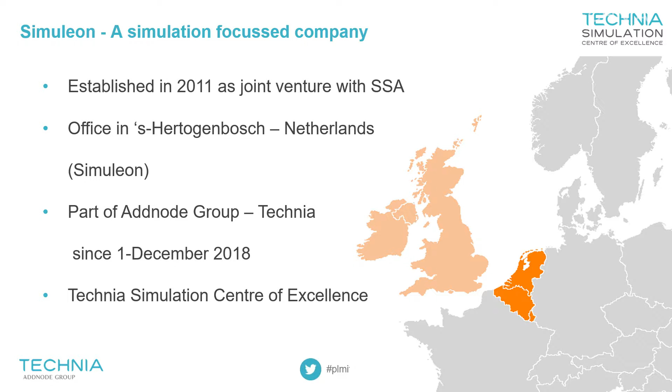So, our company was established in 2011, and that was in the time when I was still working for a SolidWorks reseller. From that business, we started up this company together with another company in the UK called SSA. Both companies formed together, were called Simuleon, and we were working together already for a very long time.

As per 1st of December, we were acquired by Addnode, or by TECHNIA actually, to form the TECHNIA Simulation Center of Excellence and to help TECHNIA with the exploration of simulation within their installed customer base. And obviously the PLM knowledge would also be of beneficial help towards our customers.

So what are we about? Obviously we are a highly focused group, so we don't do anything else than simulation, so that is what we focus on. So personally I haven't done anything with PLM. I know a little bit about it, I know a little bit about CAD, but I'm not a specialist like these guys.

In total, we're approximately 30 simulation specialists, developing simulation models and material models, all those kinds of things. That makes us actually one of the biggest Simulia providers within Western Europe, and therefore a highly recommended partner from Dassault.

What you need to know from the Simulia solutions that we provide is that we don't really focus on one given industry. So I'm now doing a presentation here in civil engineering and construction, but I'm also doing a presentation in industrial equipment. And the reason for that is that with the simulation solutions, we don't really focus on an industry, but we just focus on solving engineering challenges. And they can be in any industry, basically, whether that's life science or civil engineering, industrial equipment, automotive, aerospace, doesn't really matter.

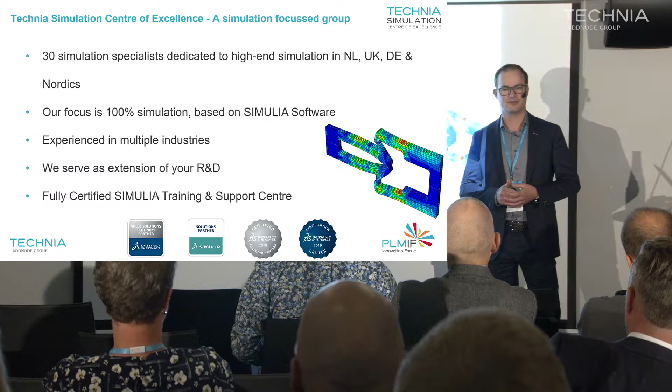Unnecessary to say, but we are fully certified. We have all stickers and buttons and certifications, obviously, to do everything that is needed to position these tools. So what is then our added value? If you look at the value that we provide, then simulation is all about the knowledge.

So the people that we have in our skill set, they come from different areas. We have people who are experienced in biomechanical engineering, windmill structures, foundations, earthquake analysis, vibrations, those kinds of things. Those are all things that we do. In the world of simulation, there are things which we call linear analysis and non-linear analysis. I'll tell you a little bit about that, what that is.

But we mainly focus on high-end simulation, which we see as non-linear analysis, and I'll explain later on what that is. Obviously, because we use the Dassault simulation portfolio, the complete Simulia brand, you can expect to have the latest and greatest technology applied to solve your challenges, and we are very open and collaborative in how we do the things we do. So what is it then that we deliver as the TECHNIA Simulation Center of Excellence? It's a combination of four things.

So on one hand, obviously we provide software, but I don't think we are only a generic software provider, because we are also a customer of Dassault. We purchase the software, we use the software, and if you look at our margin revenue stream as a company, then approximately 50% is coming from services.

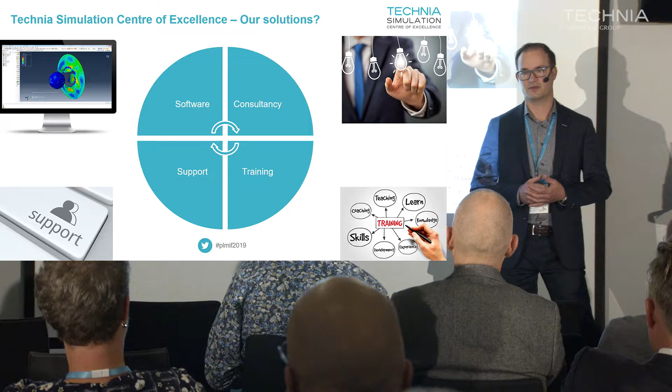So mainly a lot of customers who say, oh, that's all very nice, that technology, but we're not going to invest in it. It's too difficult, we don't have the knowledge. So in that particular case, we can do the analysis for them and solve their problem and provide them with a report or guidance or whatever needs to be approved for the product or the process. We also do consulting, support, and training, obviously.

So if you need some software, obviously you also need to know how to work with it. So we provide you some training and some support along the way. So what is then the total product portfolio? I won't go into too much detail on what all these tools are and what they do, but it's a little bit much. Our flagship is obviously Abaqus.

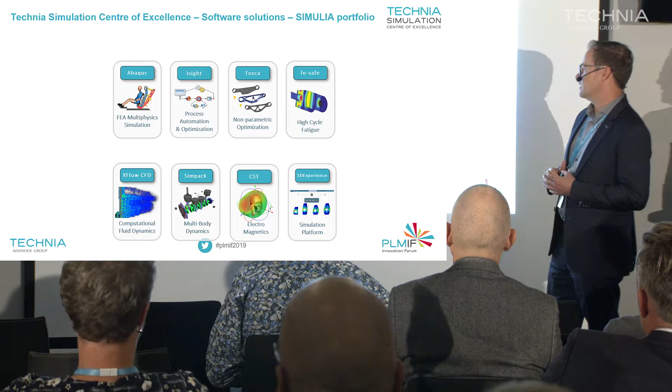That's the high-end nonlinear FE solver that we use to solve all these difficult challenges, whether that's earthquake analysis or crack propagation in concrete or things that have to do with topology optimization. We have different tools for that. And the nice thing is that all these tools can be combined with flexible licensing modules from Dassault, basically.

So what do we end up with then? In the world of PLM, and that's obviously the public here today, you probably know more about PLM than I do. But therefore, I thought this slide was quite important. So from a software perspective, we have what we call unconnected FE. Those are basically the standalone tools that are not connected to any PLM system or data management system whatsoever. You just do your simulation job, provide the answer, and that's it.

The other one is FE connected to PLM. So we have solutions which we call Power'By. We also have that for Abaqus, for XFlow, for almost all the tools you just saw in the overview. And that means that all the data that the specialists generate can be managed in the platform, and you can therefore do simulation lifecycle management. So basically manage your simulation data.

You can communicate about the data, and you can also utilize those nice platform technology things like high-performance cluster computing, high-performance visualization, sharing on the cloud, sharing on multiple clusters. That's all available in that new type of software.

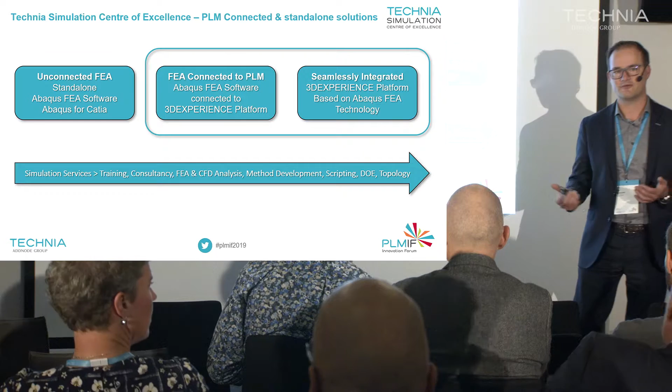And then obviously we have the seamlessly integrated software, and those are the exact same technologies, either from Abaqus or from the other tools, but then 100% integrated within the platform. So you don't leave the platform, you just open an app in the platform and you just do your thing there. And obviously everything is supported with our knowledge and how we help our customers.

So the announcement was about high-end simulation, but before I talk about high-end simulation, I guess it's important to also understand what the difference is. So therefore I try to explain also what mid-level or, let's say, entry-level simulation is. And in our view, entry-level simulation is really a CAD-integrated finite element analysis tool that helps you to assess your assumptions during engineering. It's rather straightforward, but these kinds of tools are really meant for the designers.

It's not too complex, but it works very easily, integrated in the CAD environment. And yeah, that's what we see as entry-level simulation. But this is not really what we do. And without going into full detail and all formulas, if you talk about linear static analysis, for the people who don't know, this is a stress-strain curve.

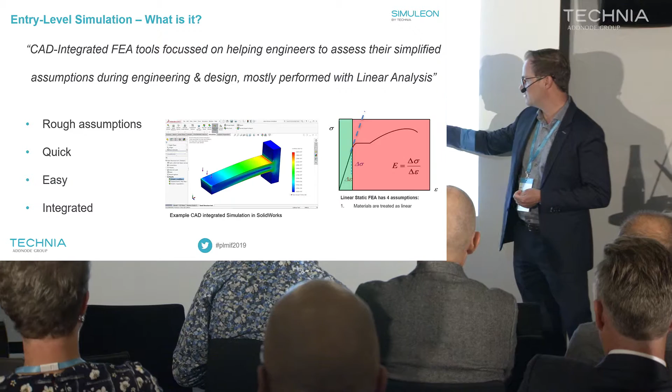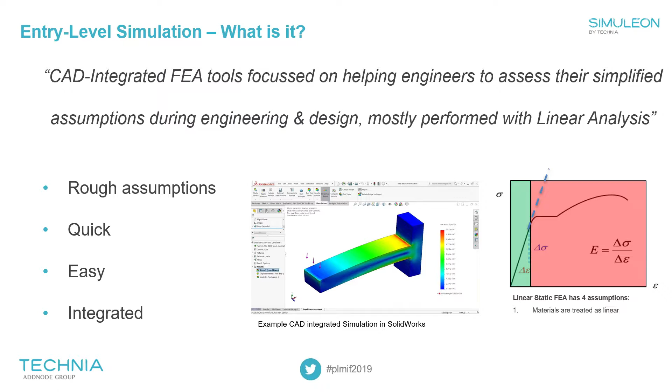So if you have a piece of metal or whatever and you put it in a tension machine, you see that once you start pulling it, it measures the stress versus strain in this case. And what you see is that it will first show a linear behavior. So that means that if I make the force twice as big, then the displacement will also be twice as much. That's the linear assumption.

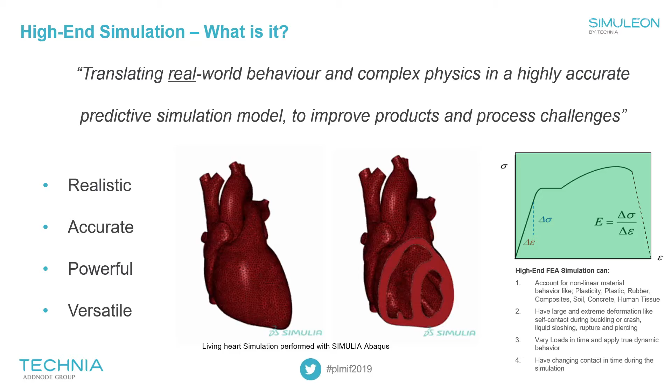We can do until the deflection point. We can even go beyond. So when there is failure in the model or in the steel or in the concrete or in whatever type of material, we can also show you how it's going to fail. And I have some later examples of how that can be done.

So what is then high-end simulation? It is really translating real-world behavior with very complex physics in order to capture the full behavior and have good predictive models. That's what it's all about. And obviously these can be realistic, accurate, powerful and versatile.

I mean, such a thing like the Living Heart, I think it's been discussed or mentioned many times already. But if you think about all the physics that are in a simulation model of a heart and what is driving that, it is really all the muscles being modeled.

There is a piezoelectric current driving those muscles. Those muscles are being contracted. The contractions have interaction with human tissue. The human tissue is actually modeled. So this is not just a rubber kind of material. It's really human tissue that is modeled here.

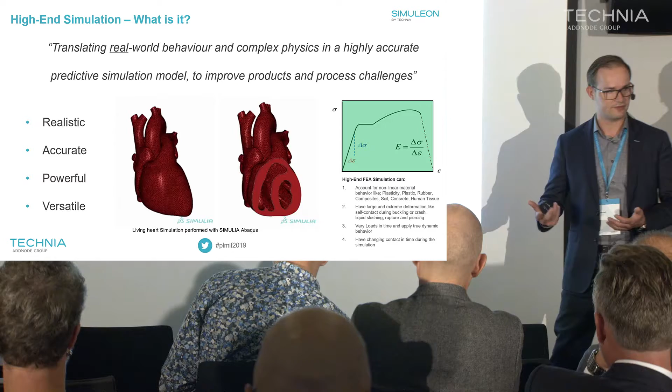And that is how you can make your predictions accurate. Obviously, that's a whole journey of validating your model, making sure you have the right material assumptions. But once you're there, it's very valuable to be able to optimize your products and your processes.

Okay, so back to AEC. So what is it that we can capture in total with the help of high-end simulation? Now, obviously, these are pretty common things, but if you think about structural configuration, there are many solutions to basically bridge the gap, if you would like to mention that. So you can have construction A, B, C.

So you need to assess whether all these trusses that come together will hold, if they have a certain amount of lifetime, what is the fatigue amount, if it's built from steel. How will it be connected? Will it be bolted? Will it be welded? Those kind of things, they can all be assessed. Same as with material behavior.

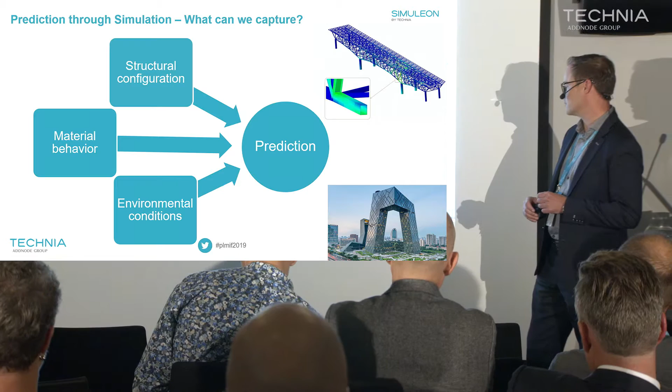Obviously, within your industry, we see a trend of using more exotic types of materials, whether that's honeycomb structures, composites, plywood. It could basically be everything. Those are things you can take into account. And also environmental conditions, obviously, that can all be used as an input.

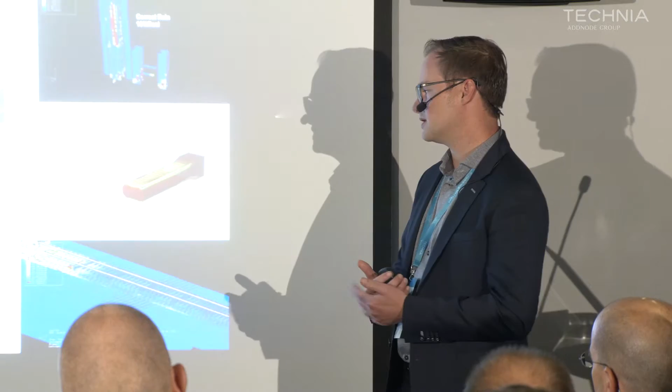So, if we talk about structural analysis, that is what we call strength analysis, or things where you want to assess basically the strength or the displacements, or will it fail, yes or no, and if it fails, how does it fail? Those can be done with structural analysis. So, if we talk about Abaqus, then that is mainly about doing nonlinear analysis. And nonlinear analysis, we already discussed that graph. But we have a distinction in there. So you can have nonlinear forces, nonlinear contact, nonlinear material, and we discuss them as we go.

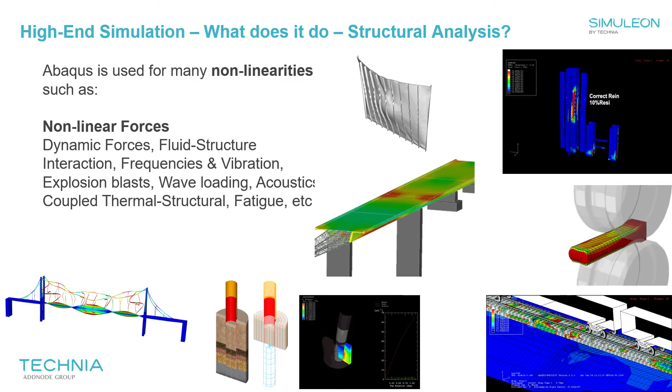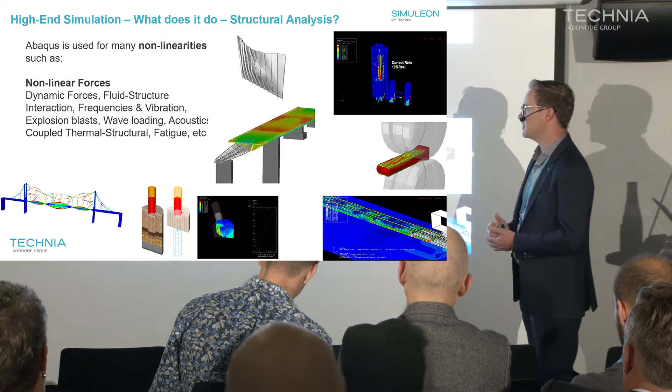But I guess you can imagine that something like an explosion is not really like a static force. It's really a dynamic force, and a force that grows and becomes bigger. There's a pressure wave, and that all needs to be incorporated. Same here. You have a dynamic load of a train going over a rail. Maybe you want to assess the amount of frequencies or vibration in a building due to a train passing by. Those are all kinds of dynamic analysis, which makes it rather nonlinear. And a good example is earthquake analysis, obviously.

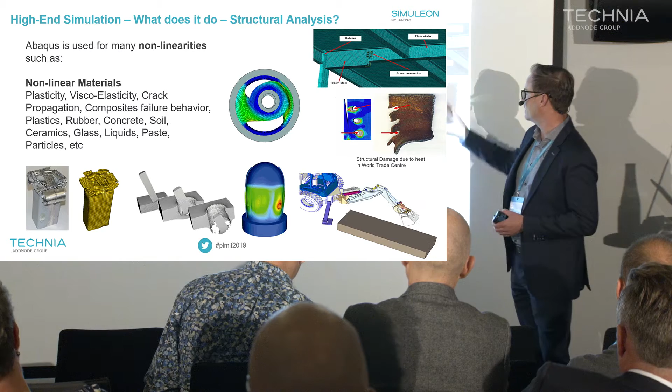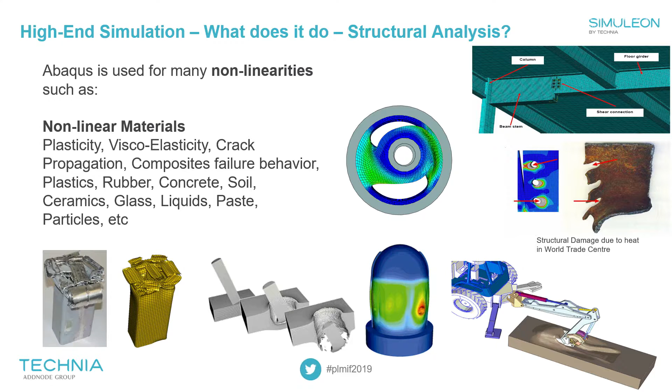Then the next nonlinearity is material. So if you think about the first linear curve, that would be steel if you don't do any plastic deformation. But there's obviously more complex materials, things like rubber, concrete, soil. In here you even see a model of the World Trade Tower where they did an investigation on the damage accumulation. Could it be really caused by the fire in the structure causing the steel to become weaker and to have softening basically by the thermal load? The answer is yes, obviously. So those are the materials.

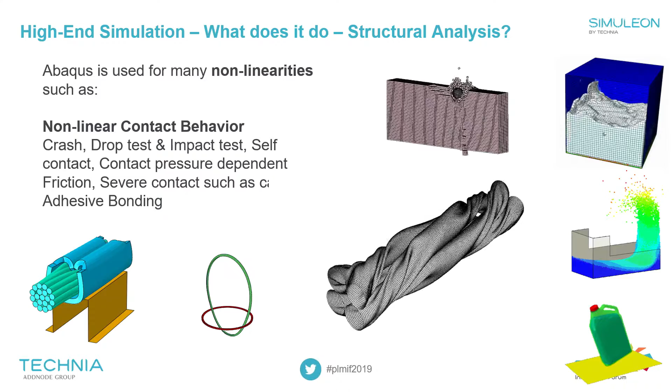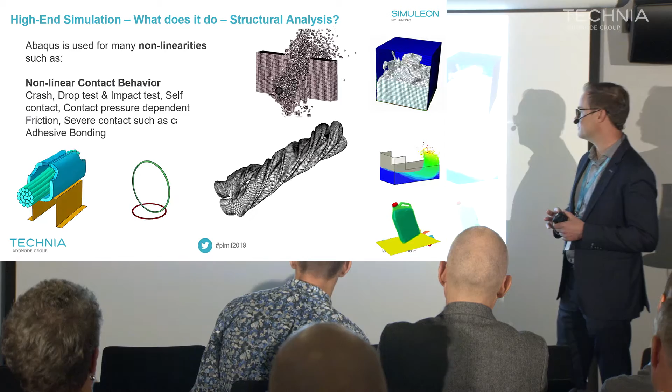Then we have things like contact. So once you have multiple parts in contact, then the world becomes very nonlinear because there is no standard thing in contact. So once things go slipping, or there's friction, or there's movement, or bricks falling off a wall or whatsoever, that's all very dynamic. And that's what we can model with Abaqus very, very accurately.

Most of the things we do have to do with something that is being driven by risk. Either they want to make sure that their investment is safe, so they don't want to put in all the money and then have a building that basically collapses. So it's all about risk assessment. Will it fail? Will it hold? If I'm standing here as a person and there will be some movement or some wind loading, can I still work comfortably there, or will the whole building start shaking? Which is not really uncommon, by the way.

New materials, how will they behave? We already discussed honeycomb structures or things like composites, fiber reinforced concrete. Also kind of a nice material that a lot of people are working on these days.

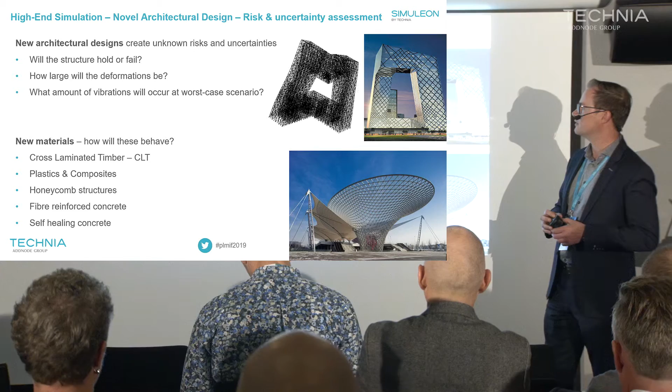Then performance-based design, those are really the type of structures that are really heavily loaded. Think about an extreme dam in this case, or a nuclear power reactor. Obviously, there's very different specifications in these kinds of structures to do the design. If you look at a nuclear reactor, there's even specifications where you have to make sure that the structure keeps on standing if something flies in or not.

So those things can be really assessed. Also, the lifetime of the concrete is very important in combination with all the steel reinforcements and rebars, and the thermal aspects of that. So that can really be modeled and simulated.

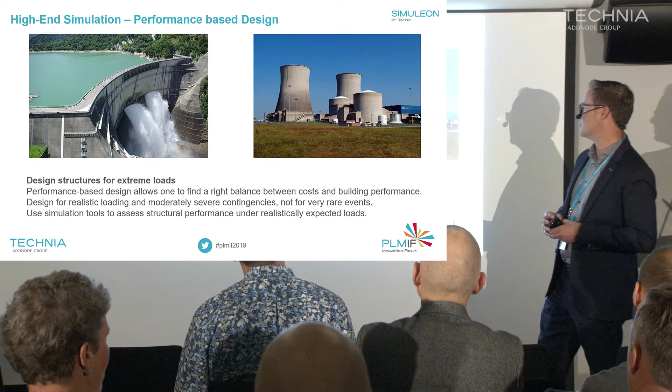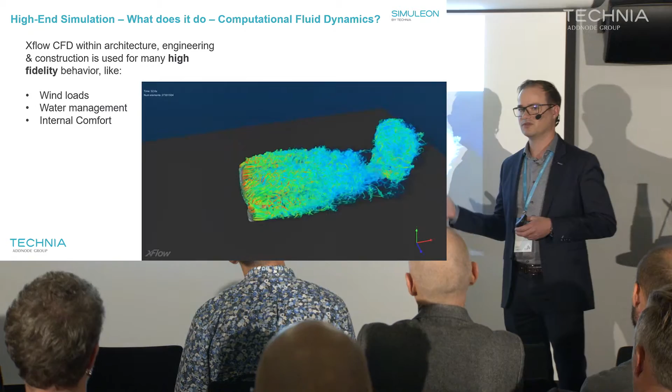That was mainly about structural analysis. Another area of our business is to do computational fluid dynamics, basically flow simulations. This is a nice example here of a football stadium.

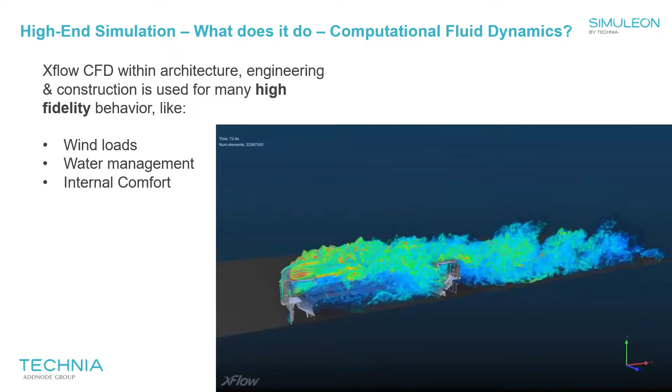The things we can really assess are: what will this thing do? If there is a certain wind from a certain direction, will these people still be comfortable, yes or no? What are the actual wind loads on the facade, for instance? Will they fly away if there is a storm, or will they stick in place? Those are all things you can assess, and we can help you with that.

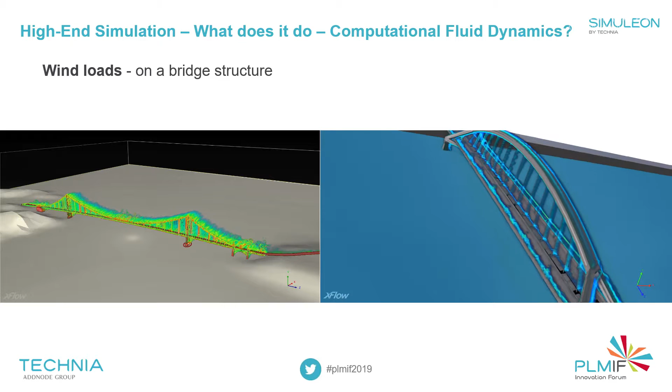Next one, wind loads. If you look at the wind loads on a bridge, I guess everybody has seen the Tacoma bridge with the moving deck. That wasn't a consequence of modal frequency only. What they probably didn't tell you in the full story is that the frequency was basically caused by the wind loading.

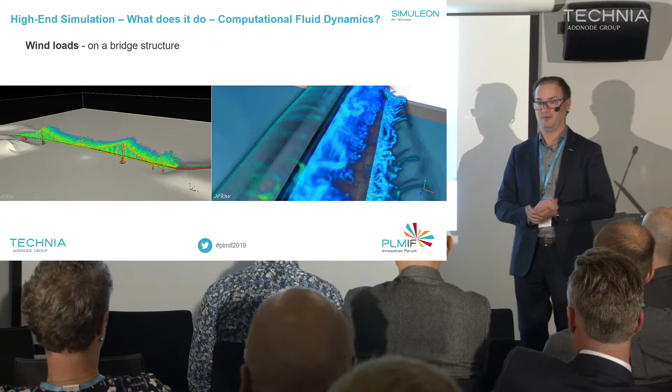The wind loading was around all these stays basically, and if you do that, all those vortexes of the wind go behind all the tension bars, and those vortexes start letting the whole structure move. Once it starts moving, and that frequency is close to its natural frequency, then you have a problem, because the whole structure will start moving and will only get worse and worse. So that's something you can assess with simulation.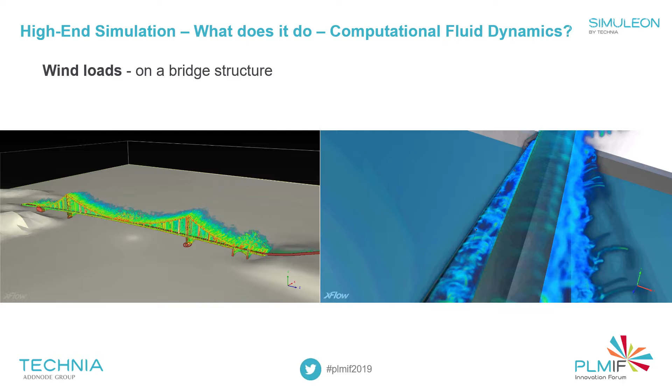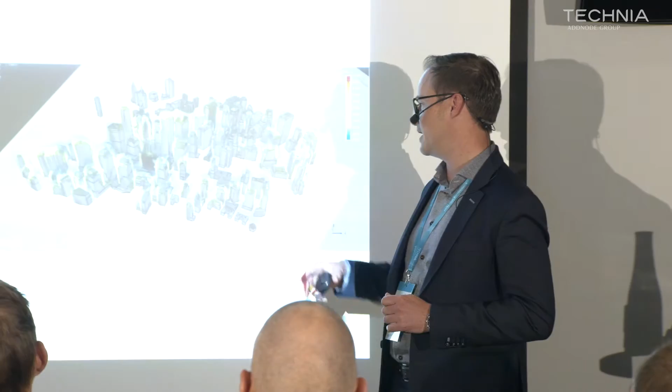This is another wind speed analysis, obviously more for cities. So the effect you get if you have multiple buildings together is that you create these kind of Venturi situations. We even had a situation in the Netherlands where they built a subway and forgot to do these kind of tests. So you had a train passing by the station, but all the turning doors on the outside of the train station would start rotating once the train was passing by. I don't think those are really nice situations to happen, and that's something you can really assess beforehand.

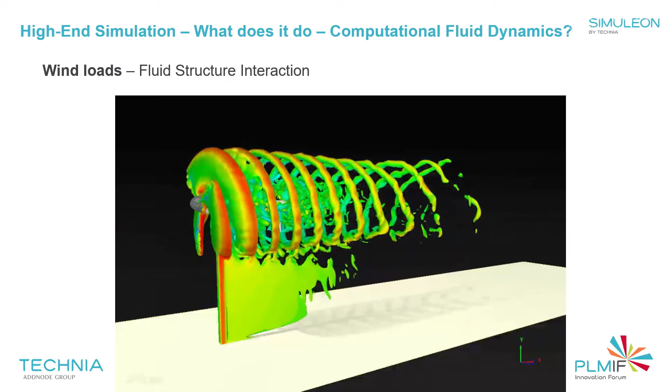Another thing that we do is what we call fluid structure interaction. So what you see is that, in normal language, this structure is being driven by a flow - I think that's the most appropriate way to say it. If the wind starts, then the propeller will start rotating, and you want to know how fast it will be rotating, what the angle of the blades will be, and how it will impact the total structure.

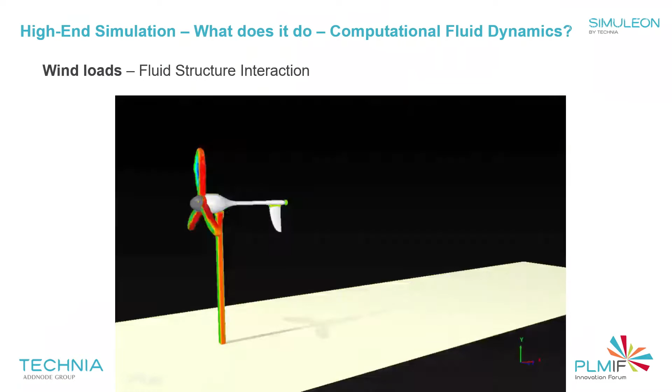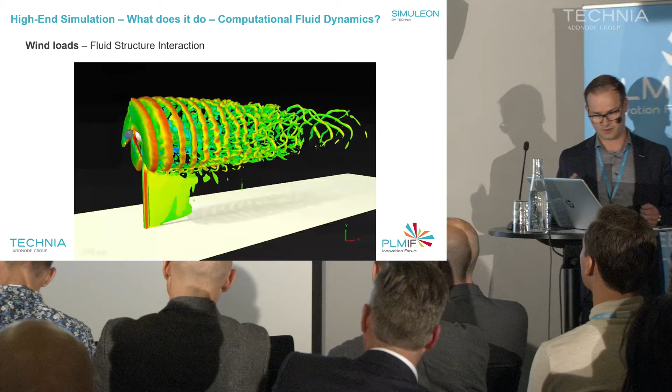If you have a foundation, you need to know what the forces are due to the wind. You can actually assess this - there are also multiple codes that you need to apply, but if you really want to know it, you can simulate it as well.

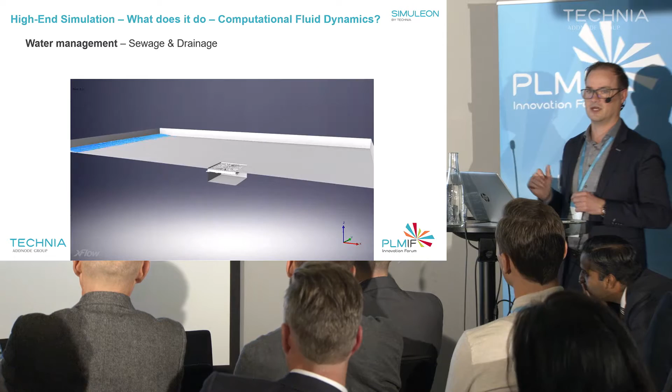Same with water management. In the Netherlands, we're pretty famous for living below sea level, so we have all kinds of issues with this. In Rotterdam, they have a very famous square where, if it starts to rain, the whole square turns into a pond basically, and it's done deliberately. They have all these systems to capture the water and make sure it doesn't bring any harm. Those things can really be simulated beforehand as well.

Other things like bridge pillars - you see water coming here with waves hitting the foundation. As an engineer, it can be very complex to assess which loads are basically coming from the tidal water, and that's something you can bring into account by doing these kind of analyses.

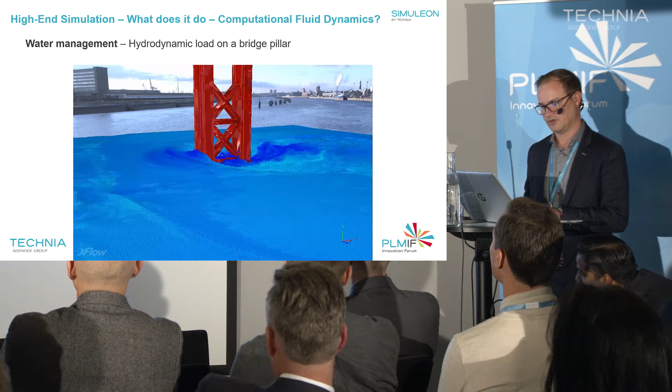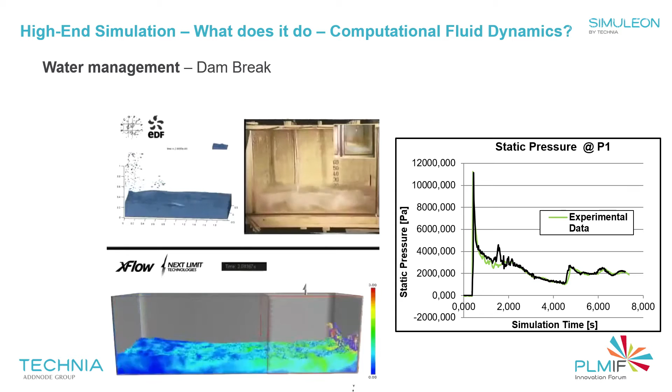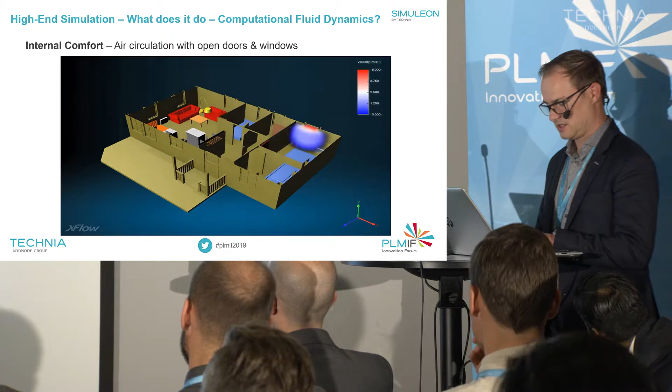Another area that we do our work in is internal comfort, so HVAC. This is all about thermal, personal comfort in buildings, amount of moisture. We also do a lot of things in clean rooms, where people need to be able to predict whether there will be some dust or moisture, or how to prevent that basically. So that's also something we do.

On the bottom left, you see an example of a smoke simulation of a metro subway. You see the smoke being induced by fire, and obviously the smoke needs to go up, and you want to develop a system that can capture that and get rid of it.

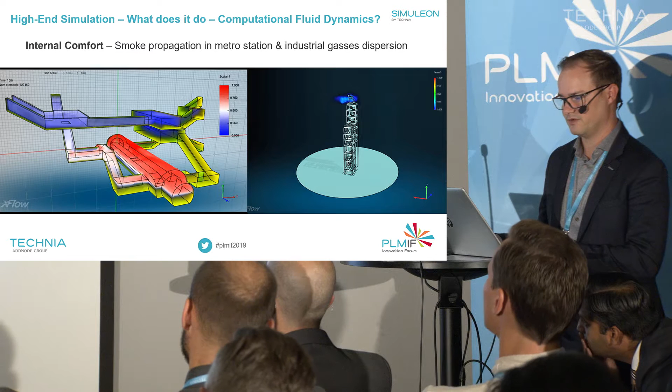On the right-hand side, you see a dispersion of industrial gases. We had some accidents in the Netherlands as well, where very toxic gases came out of an oil plant, and they needed to do a root cause analysis of where the potential spread of the toxic gas would come, and in which area of the city, and what could be potentially affected. So those things can be simulated as well.

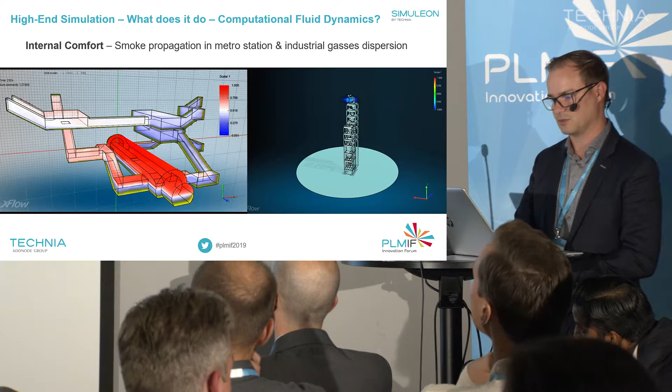That's all about thermal. So thermal application is also something you do with CFD. This is a very nice example of anyone opening their fridge.

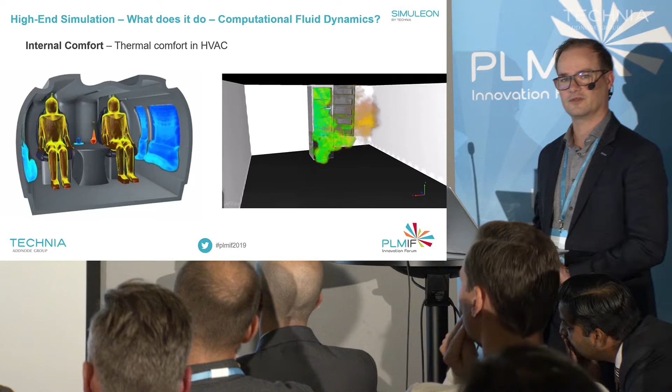This is actually what happens if you open the fridge door and leave it open too long. You actually see the cold air falling on the ground. If you weren't wearing any shoes, or were barefoot, you would actually feel the cold around your feet going down, and this is what is virtually happening. So with these simulation tools, you can virtually see things that normally are very difficult to predict, and you can change your design and make sure that the person in the cabin, or wherever, is feeling comfortable.

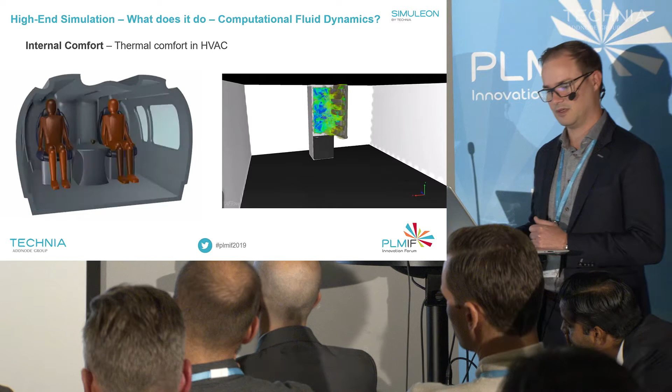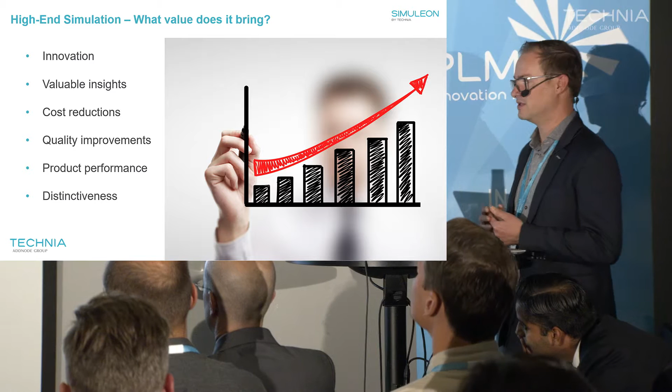So then, as a short summary, what value does high-end simulation bring? Well, in my perspective, it brings a lot of innovation, because you can bring value and see things that you normally couldn't really see. A lot of what we do is also about cost reductions. Normally it's really contradictory, because the product performance should be better, but it should be lighter, it should be cheaper, but it still should be stronger. That's a very difficult task to do, and I think it's almost impossible doing that without simulation.

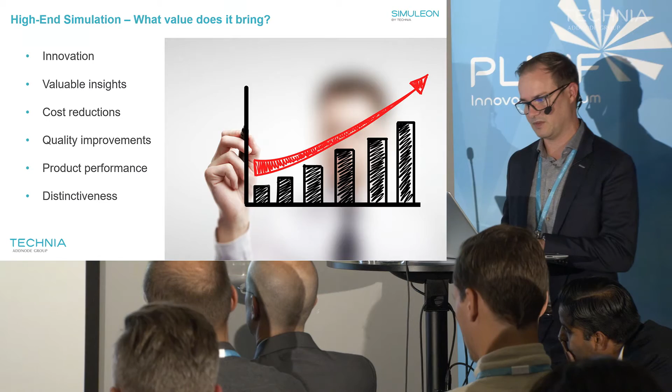And you see products that can be very simple, but have a lot of complexity in them, and those really bring distinctiveness. So those are most likely the products that are really being thought about with the help of simulation. So then some examples.

This is one of our customers in Benelux. It's called TNO, a research facility. What you see on the left is one of our bridges. One of the issues in the Netherlands is that we have a lot of bridges, and they are all pre-World War II, so they were there already for a long time. These are steel bridges, and they were designed in an era where there wasn't the amount of cars that we have today. So that was one of the major issues.

We had a real big incident in the Netherlands where in 2016 they had to shut down the highway, the A27, which goes from basically south to north of the Netherlands. The reason for that was that they found cracks in the bridge. In this area, if you see this beam structure, they found cracks that were so big that they needed to stop all traffic immediately. They didn't realize how lucky they were, and they only realized that later on. In January 2019, a report came out about how close they were.

But once you see it, you still have to make it better. So in this case, TNO did all sorts of calculations on how they could quickly get a fix to make sure the bridge was not collapsing and that traffic could easily go over it again. What they basically did is create these kinds of structures on the bottom side, which they bolted and plated together, and made sure they did additional checks. This bridge doesn't last very long though - plans are now to replace the complete bridge before 2021.

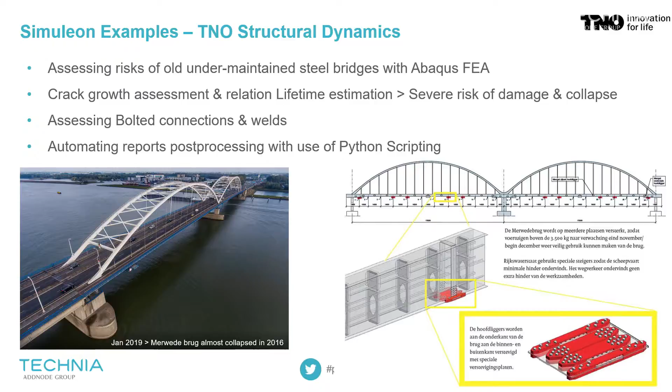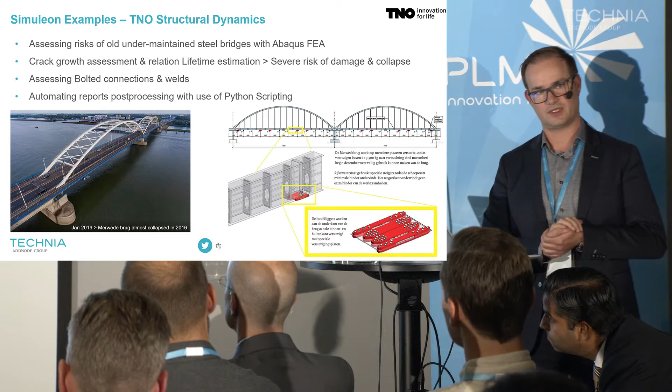So this one is done. But we helped the customer assess this. We also helped them with the use of Abaqus, where they could really assess what to do and how to improve the design to make sure the bridge did not collapse. And luckily it didn't, or else we would be ending up with those Italian issues.

This is a different customer, called Deltares. They are all about water management and soils, so these guys know a lot about dams and dikes and those kinds of things. But this given product they did was a very specific one, because they needed a prediction of the Mars lander on the surface of Mars. If you design a Mars lander, you need to make sure that the wheels, once they start rotating over the surface of Mars, won't get stuck once the thing lands there.

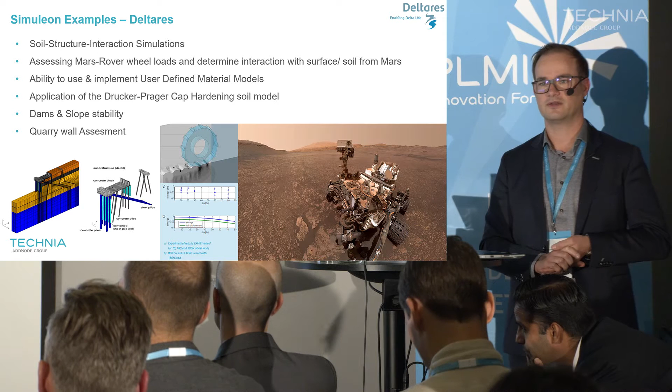You don't want that, because once it's stuck, you can't really get it out anymore. So they did all these kinds of simulations and assessments on the type of soil and the interaction of the soil, since they needed the wheels potentially rotating on that soil. That's what they did. They also do a lot of things about dams and slope stability, and we help them with their knowledge.

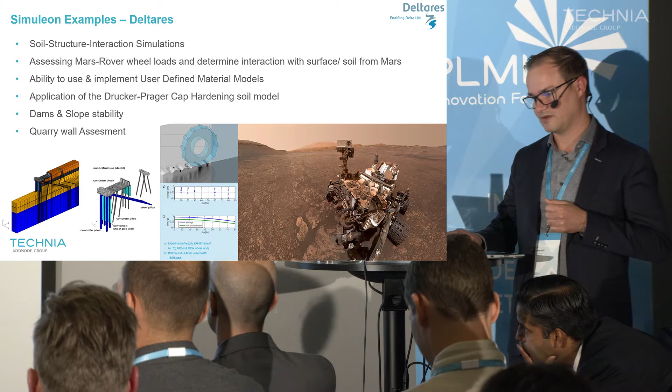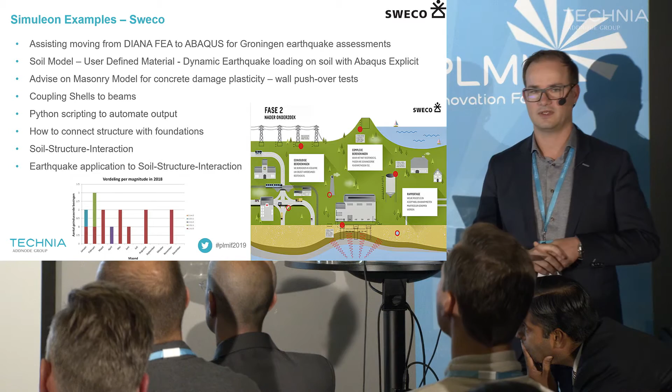This is something that we did for another company in the Netherlands. I also know that they're in Sweden, Sweco. But in this particular case, they were having different tools than Abaqus. They always used Diana, which is a development from the University of Delft. And with that tool, they were facing some difficulties, and they wanted to move into doing a proper automated way of running these analyses.

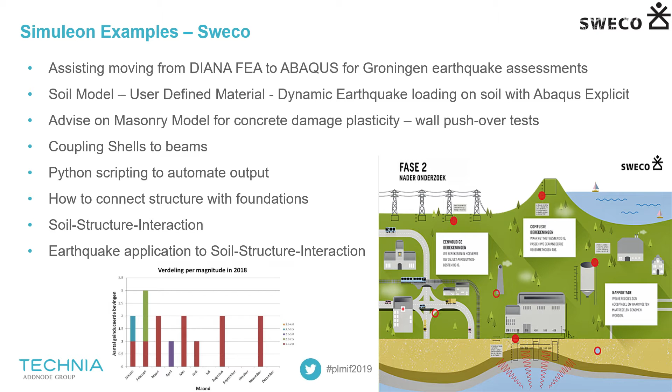In the north of the Netherlands, called Groningen, the Groningen province, we have a lot of issues with earthquakes these moments, because they pump gas, natural gas, out of the ground. And due to that fact, there are a lot of earthquakes. How funny. So now they have to solve that.

They have to restructure all the houses. They have to stiffen those. They have to repair them, which is a big issue. So these guys are actually modeling the houses with all the concrete and all the masonry in between, and they are doing root cause analysis to predict whether it's a crack that came from an earthquake or whether it's a crack that came from somewhere else, because obviously this is a money question, because who's going to pay for it? Is it the government? Is it the people who get the gas out of the ground? It's a major issue. But these guys do the actual assessments on the houses, and we helped them to do so.

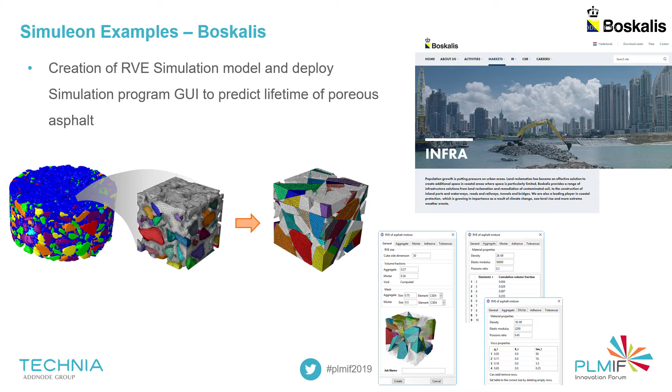This is a different customer, Boskalis. They are quite unique because these are the guys in the Netherlands who produce all this open porous asphalt. So if you have ever been driving over the roads in the Netherlands, you don't have any spray of rain when it's raining. It's very comfortable.

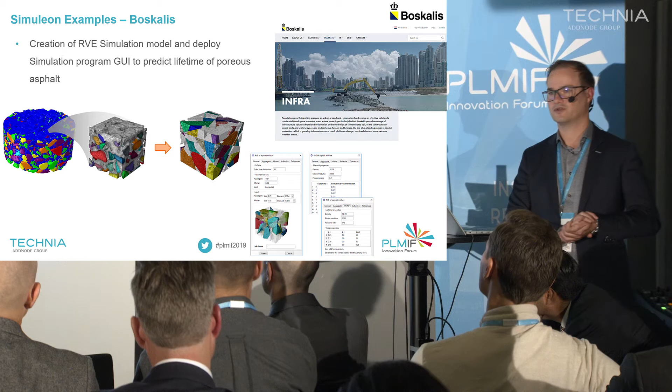But the issue is that they were one of the first laying that top layer in the Netherlands. And then they found out that the top layer is not meeting the life estimation criteria that they promised, basically. So they promised something like 25 years, and it barely hits 10. I believe I've been told that a piece of tarmac, say 1 kilometer, costs 1 million plus. So if they need to redo a piece of road, it's pretty costly.

So they only have one chance to make this better, and therefore they want to have an optimal mixture of the porous asphalt to make sure that it would meet the next lifetime estimation if they need to redo it anyway. Because they only have one chance to make the new tarmac, and then it should meet the criteria.

So what we basically did for them, and you see that completely on the left, we had a drill of a piece of road. We scanned it in 3D with a CT scan. We made 3D geometry of that. We then built a simulation model on top of that.

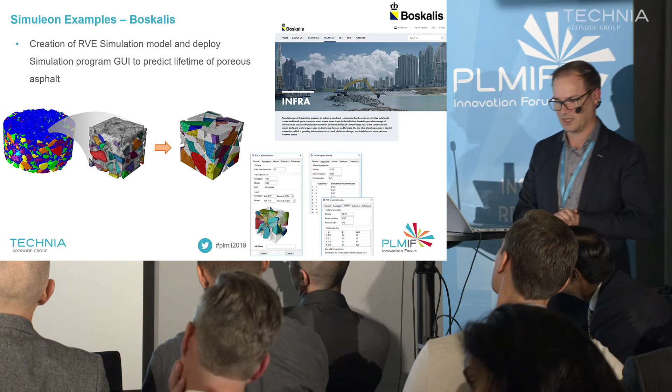We put some forces, some traction, rolling tires, and then we developed a model that Boskalis can use themselves where, in those boxes below, they can play with the amount of aggregate, the mortar, the voids, and do all their mixture predictions, because basically tarmac is a combination of many ingredients, and a certain ingredient can meet criteria, yes or no. So that's what we help them with.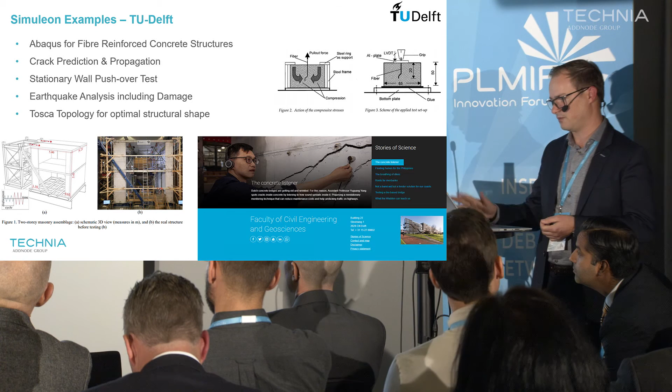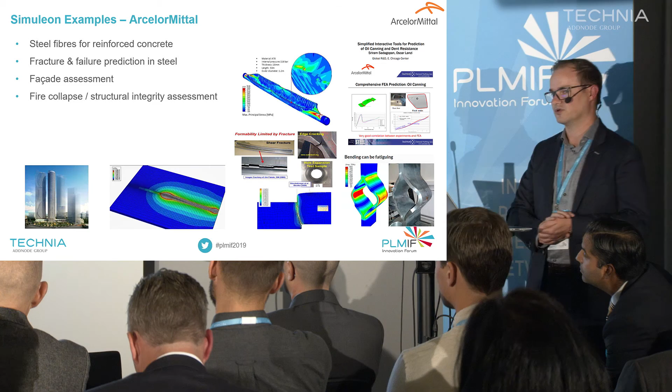But what you actually see in the middle is the actual weldment process. So once you have plates that are welded, there's a heat beam going over the surface. The metal is changing from its characteristics because there is a hardening effect. And you need to take that into account in the total structure. So we're not only doing the actual products, but in this case, it's also a process, which is the welding process, that we simulate.